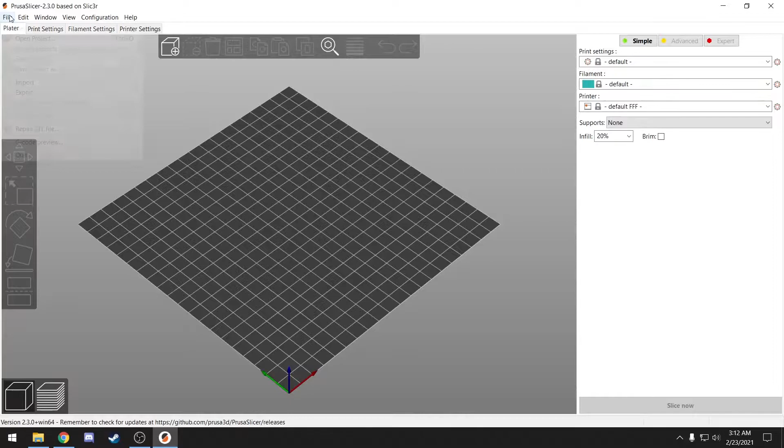Once Prusa Slicer is open, you want to make sure to hit Cancel. Then you'll go to File, Import, Import Config Bundle, and install the configuration bundle we downloaded earlier. You should see all the Marriott Library printers have been added.

Now I'm going to add my parts, space them out with the Arrange tool, and then I'm going to set this piece flat.

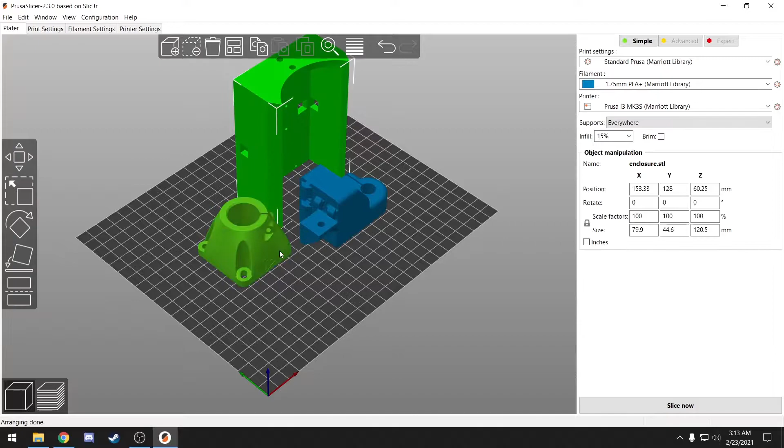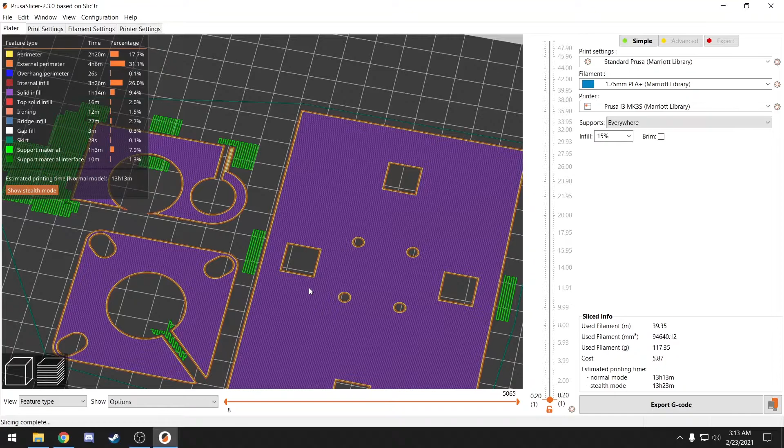Alright, I'm going to slice to get a preview. And you can grab this guy and scroll through layer by layer to see what your print is going to look like. I always check the first layer because it is important that your prints are flat on the print bed.

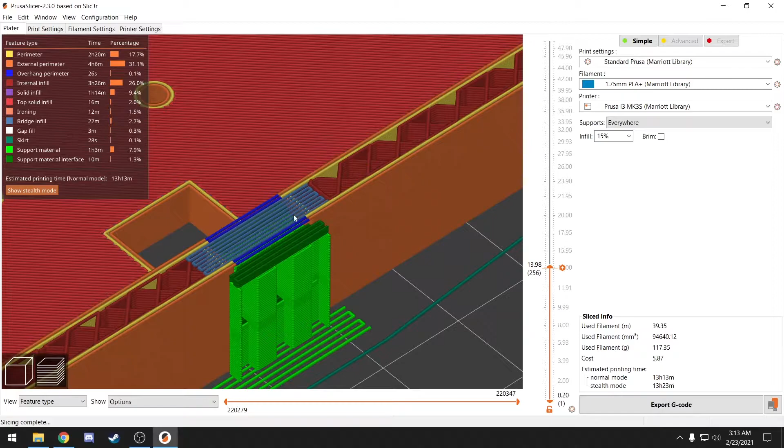Now I designed these parts so I know that I don't want support in these small holes. They should print just fine without support material. I also know that these bridges will print just fine. Our printers do a good job of spanning short gaps like this without any need for support material.

To turn off these features, I'm going to go to Expert, and then right-click on this guy, Support Material, and I'll just turn off support material for the whole part.

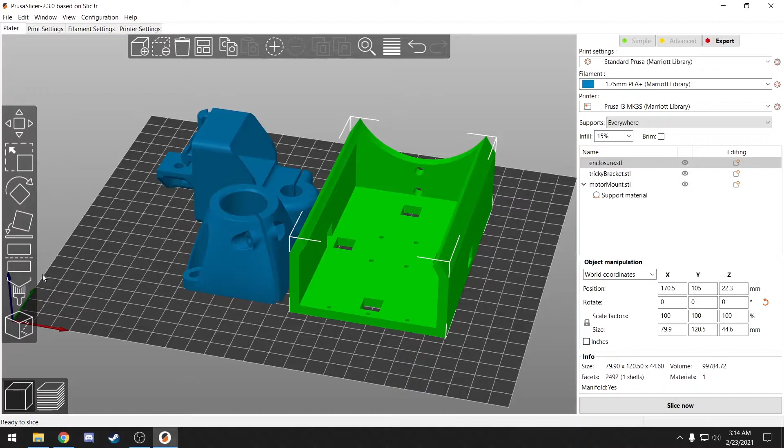For this piece, I'm going to use the Paint on Supports feature, and select the areas where I don't want support material to be generated.

Alright, let's see how it looks. I'm happy with that. It will show you an estimated weight, cost, and time over here in the corner. And that looks good to me, so I'm going to export my G-code.

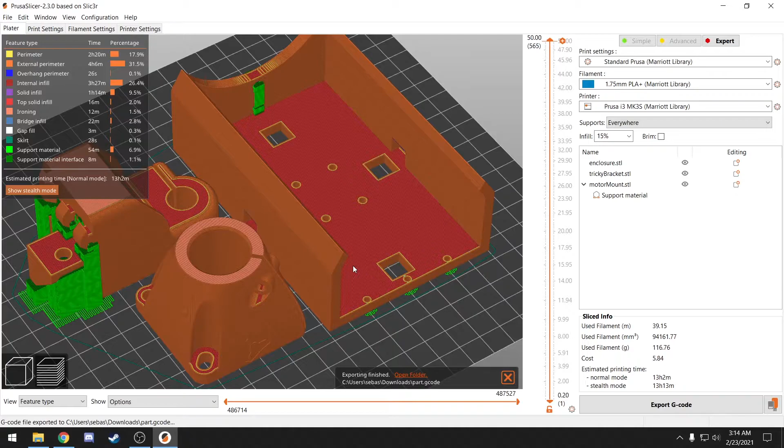Now that we have G-code, we'll come on back to this form here and fill it out. Make sure to check all the boxes that apply. Make sure to let us know which printer you are slicing for. And don't forget to check the tax-exempt box if you're using tax-exempt funding.

Add any useful information in the comments and print description box. Some professors will have you write in a class number, or even a team number.

Once you've filled this out, you'll add your G-code to the ticket, and click Submit. As long as we have Prusas available, your print should be started automatically.

You should receive a notification when your print is started, when it's time to pay, and when your part is ready for pickup. Most of our users end up paying online with a credit or debit card through the Marriott Library's website, but some tax-exempt funding can be charged differently.

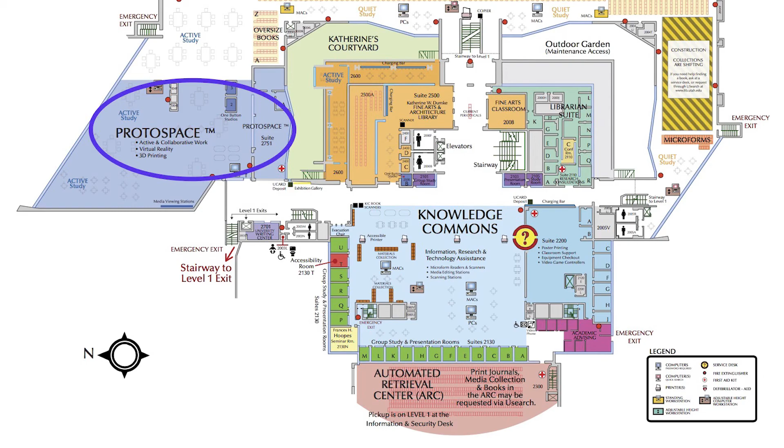Once it's time to pick up your 3D print, you'll find us on the second floor of the Marriott Library. If you're coming in the west entrance, once you go up the stairs to the second floor, you should see the Protospace office and your part nearby.

If you do have any questions, don't be afraid to email us. We can help you slice your parts over Zoom and answer any other questions you might have.